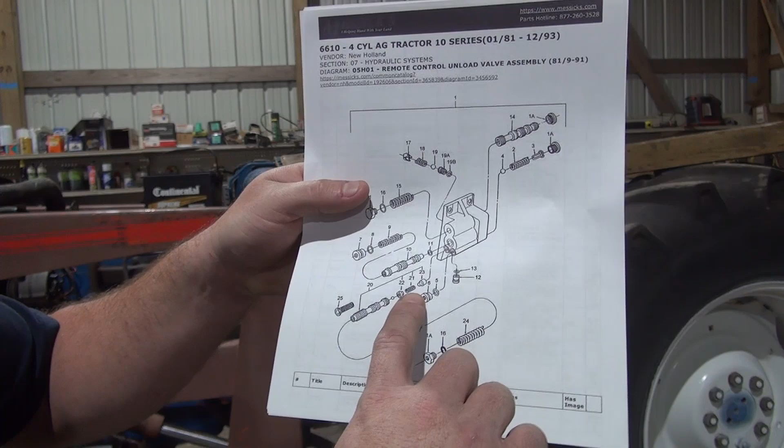There's a pressure relief right here - you take this plug out, and there's a valve right here. The camera picked this up. There's a little plug, a spring, a little valve seat, a check ball - that goes into this valve here. That is your pressure relief.

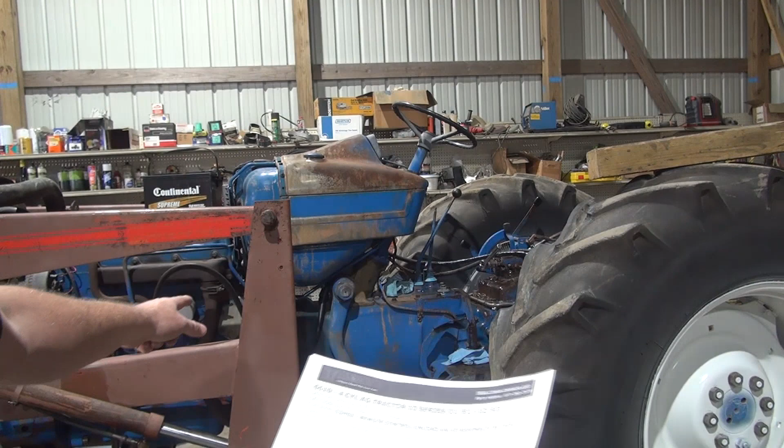I think that's for your secondary pump. Some of these tractors had a secondary pump mounted up here on the side of the engine. This one does not, so I don't know what that pressure relief really does. I mean, it does a little bit, but I don't think it's necessary, because the main pump and the transmission housing has a relief valve in it also.

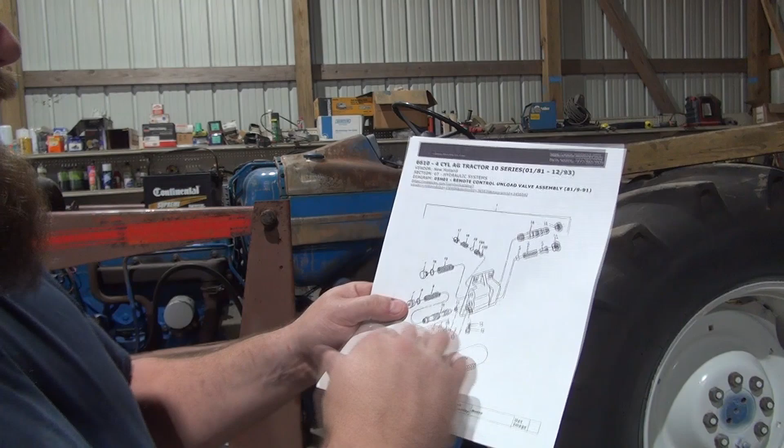Anyway, I took this out and cleaned it up. I didn't see anything wrong with it. I actually tightened it down a bit until it bottomed out, so I knew it wasn't bypassing pressure there. And I could still only get it up to about 1600 PSI. And then it would get worse - if you engaged it a couple times, a few seconds at a time, or left it on for 15 seconds or whatever, the pressure would start dropping.

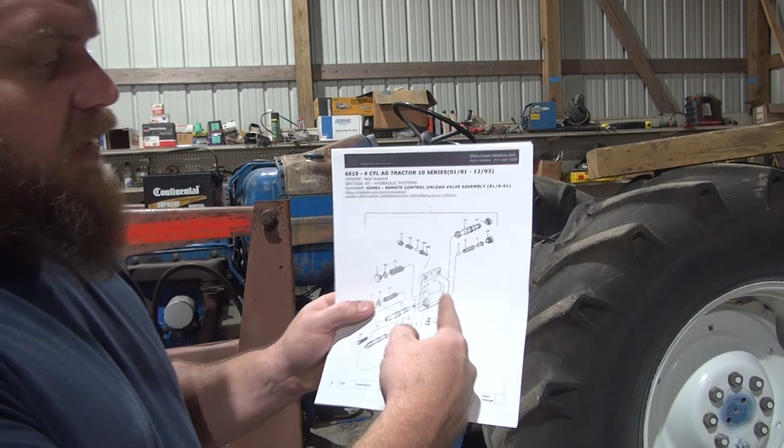It would get down to like 1100 PSI. I did that in my troubleshooting, because usually when you got a hydraulic system that's bypassing or whatnot, it'll build heat. I got the feeling of that valve there up under the seat, and I noticed it was starting to get warm across the back side of this valve, across this area right here. And I thought, there's got to be something going on with this valve.

So I took this valve all apart and went through it. I didn't have the diagram at that time, but I went through and just pulled everything out, put it back the same way that it was. I didn't see any issue with it whatsoever. So I'm still scratching my head trying to figure out what in the world I need to do here. What do I need to order? Do I need to order a hydraulic pump, or is it the valve, or is there something wrong with both of them? I'm not exactly sure at this point.

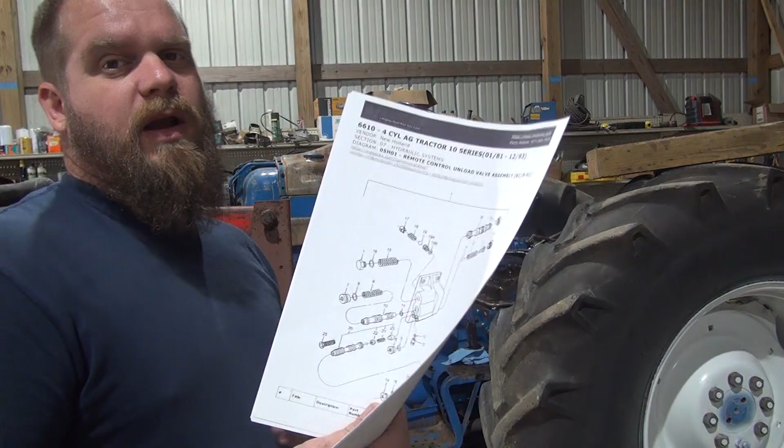So anyway, I went to Messick's and tried to research this a little bit more, and I printed out this diagram, and this is very handy. I really like this about their website, or any website that has anything like this, that you can go by and print something out. Say if you need a part for something, there's no way you're going to be able to call a dealership on the phone and say, hey, I got this valve here and I need this middle spring out from under there. They won't have any idea what you might be talking about.

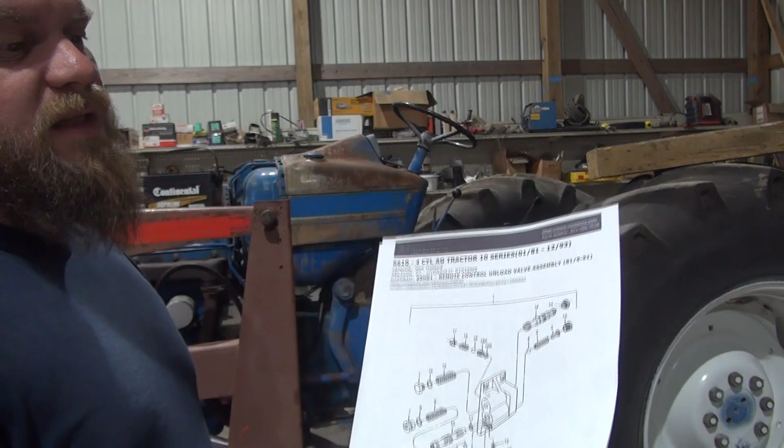But when you have a diagram like this, you can call them up and say, hey, I'm looking at this diagram right here, and I need part number so-and-so out of this diagram. And then they can look it up. It makes life a lot easier. So I really like the fact that Messick's has this on their website.

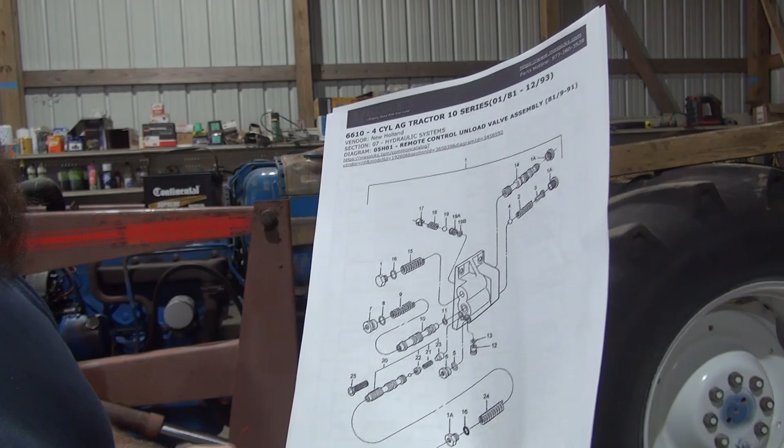So anyway, I go and I pull this diagram up, print it out and everything, and I go to looking at it. And there's two things in this valve right here that I did not see in my valve. Again, I pulled all this out. I've seen a YouTube video where a guy had a problem with this shuttle valve right here, whatever that is. It caused the same issue.

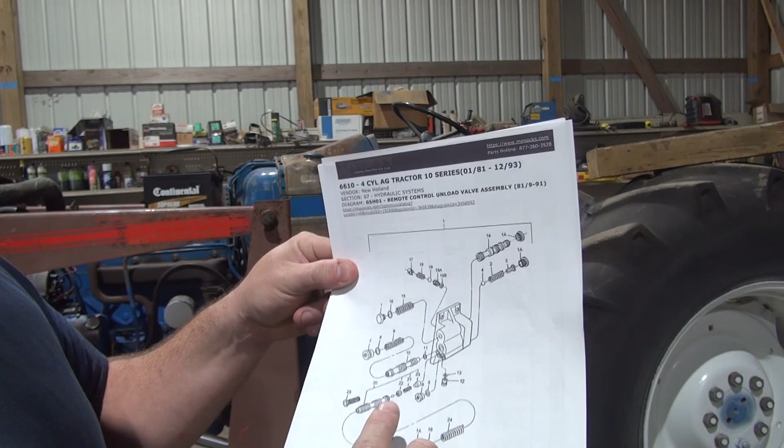And I've seen a video and some more information on the forum that they have issues with dirt getting stuck in behind this check valve and stuff right here, causing the issue, and that causes your pressure to relieve and you not get the full pressure you're supposed to get out of the remotes. So anyway, I looked at all that, I see nothing wrong with it, put it back together.

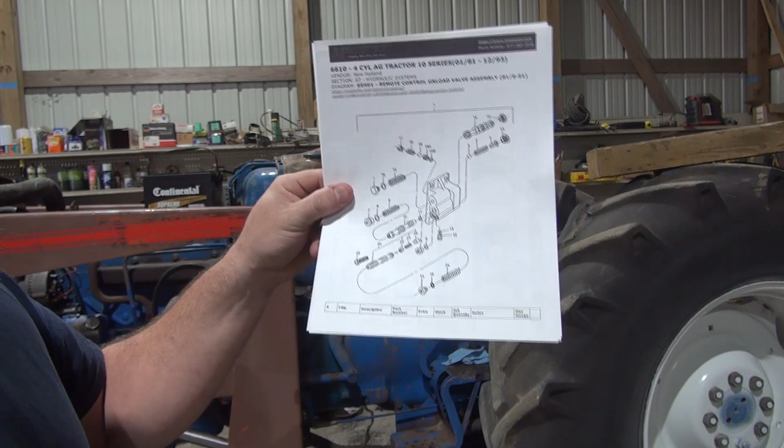So I'm still scratching my head, and I go pull up this diagram, and I go through, and I notice there's supposed to be a filter right here on this valve, which is not there on my valve. So it kind of leads me to believe that maybe somebody's been in this valve before, but that's just a filter. It shouldn't be an issue.

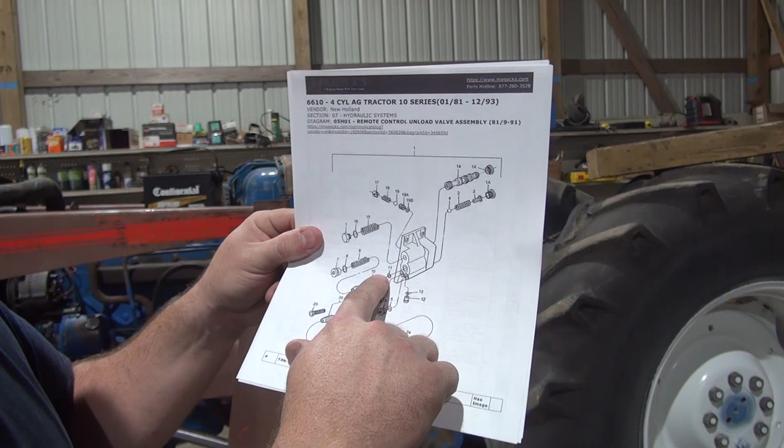The second thing I notice is on this valve right here, which is where I got the Allen wrench at over there with a ratchet sticking off in the tractor. There's an O-ring right here, that number 11 O-ring. There was no O-ring on this valve when I pulled it out. And I was like, well, I don't remember seeing that O-ring on there. So I come back out here and I pull that valve out. Sure enough, there's no O-ring in there.

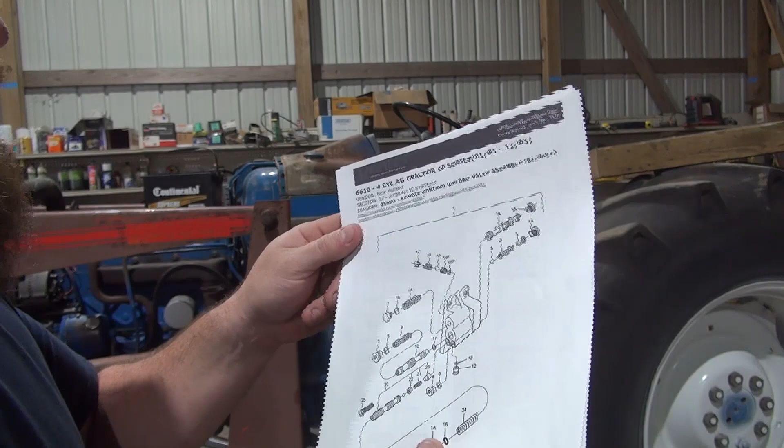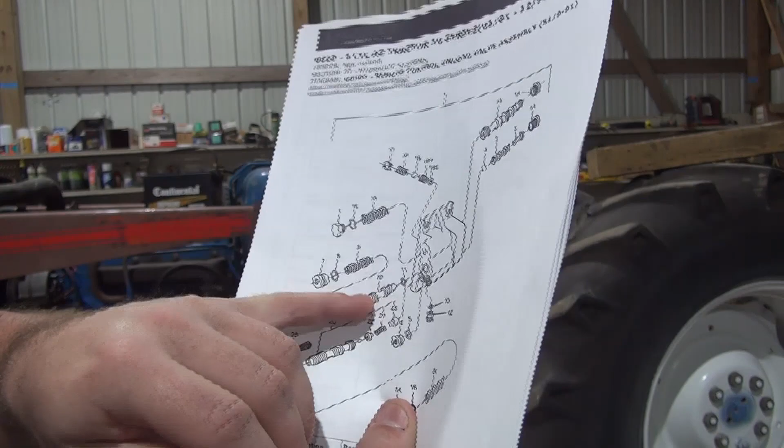I take a bore scope, look up in here with a bore scope. I don't see anything on there, any O-ring that's disintegrated or torn or anything inside there. There's no O-ring there. So I go, okay, where would this O-ring go? It's not too clear by looking at this diagram. It just shows the O-ring goes somewhere, I guess, within this valve or on this valve or to the end of this valve or something like that. So I pull the valve out and I go over there and I look and try to look up in the bore with a bore scope and try to figure out where the O-ring may go.

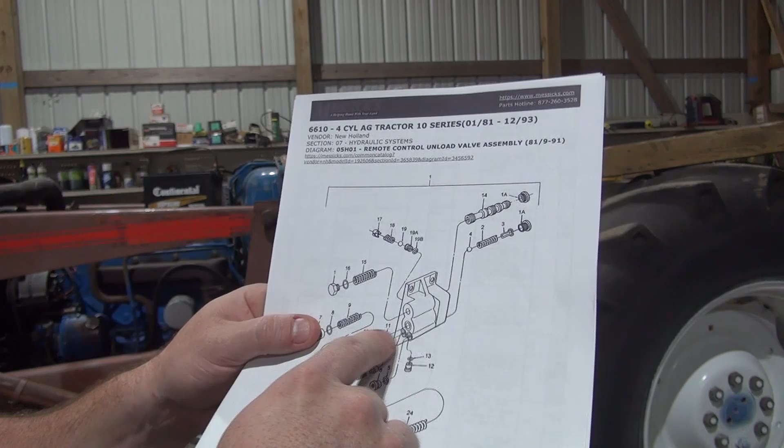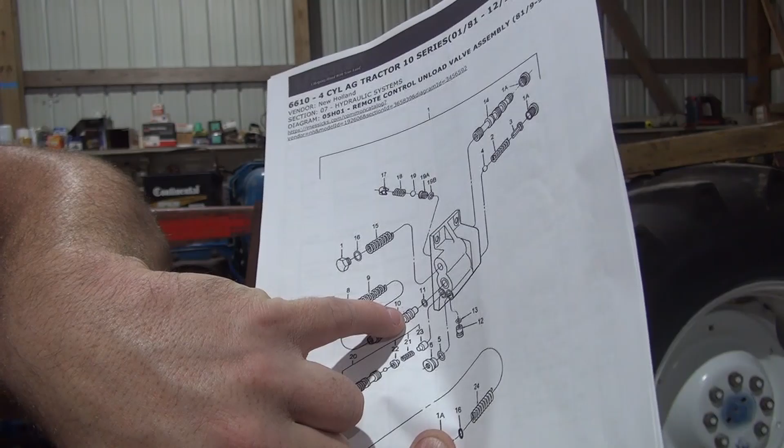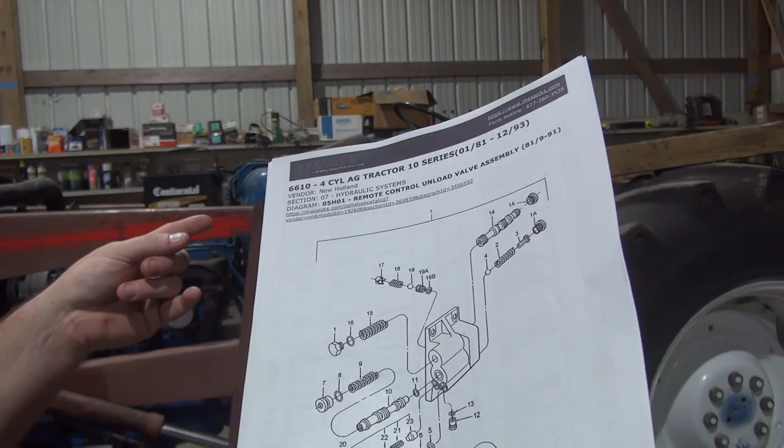What I figured out was there must supposedly be an O-ring that goes in between those two ring lands on that valve, because I put an O-ring I had out of an O-ring kit between those two ring lands, put that valve back in, and now I have 2,500 psi of pressure on my remotes like it's supposed to be. So I may demonstrate that for you guys by pulling it back apart and showing you the difference with the O-ring and without it. That way, if you run across this, it may help somebody out.

So let me pull this apart real quick. I'll crank it up and show you with the O-ring in there, then I'll pull it back out, take the O-ring out like it was, put it back in there and show you what it was doing, and you guys can see the difference that O-ring makes.

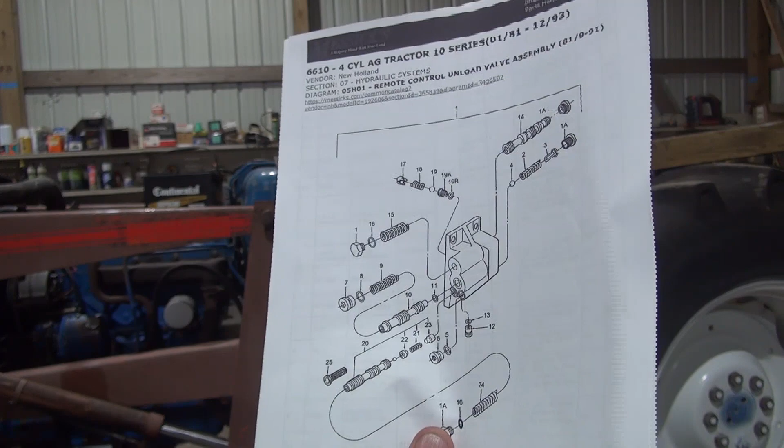I'm a little stumped on why that O-ring was not there if it's supposed to be. Surely somebody did not remove it, but at the same time, if the O-ring deteriorated, it seems like there would still be pieces of it there. So I'm not 100% sure. Let me start this thing up. I'll show you the pressure it's reading right now with the O-ring in there, and then I'm going to pull it out and show you without it in there what I've been fighting for the last 3 days.

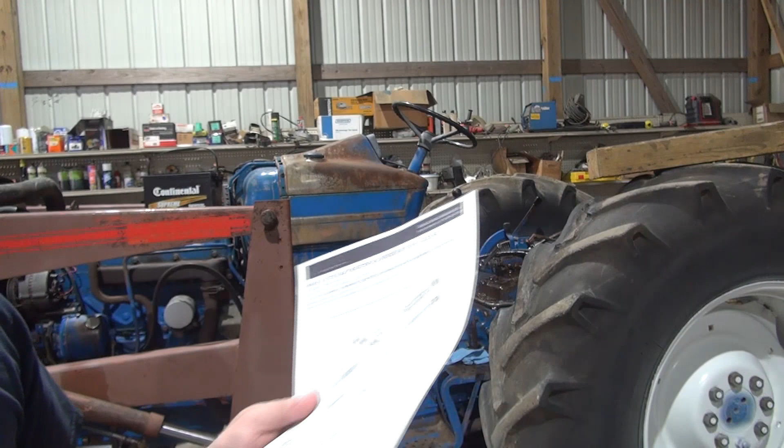All right, so this is our pressure gauge. I just got it plumbed into the remote here, and I'm fixing to engage the remote.

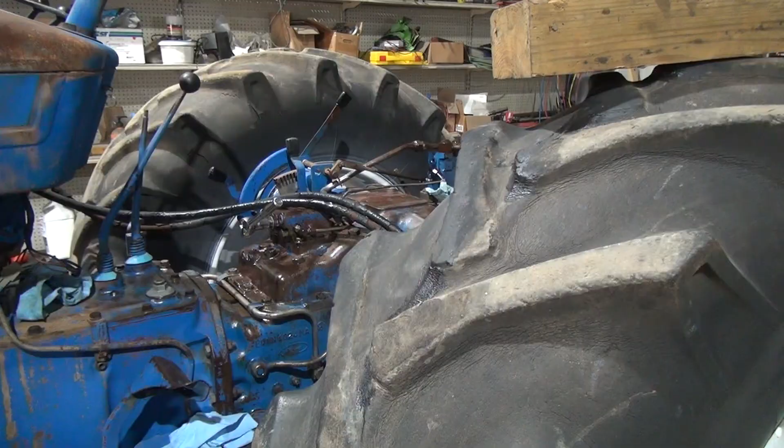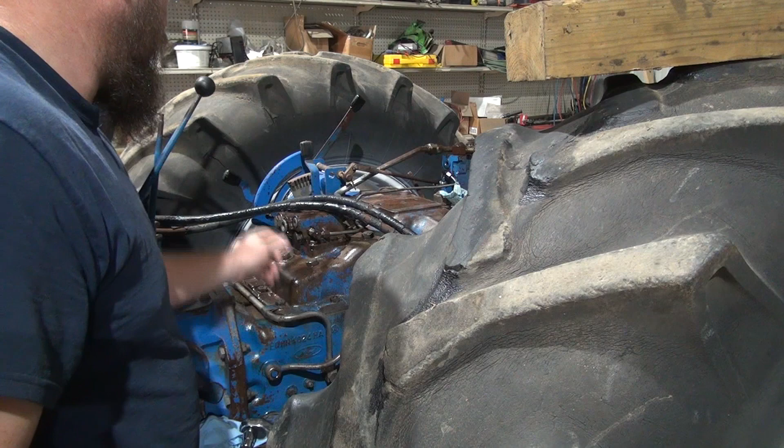Now I'm going to remove that O-ring from that valve and show you what it does. All right guys, I'm going to remove this spool valve right here and show you the O-ring that I installed on it. And the problem, in other words -- I can't talk today -- the issue is you have a spring, the plug, the spring, then there's a valve in here.

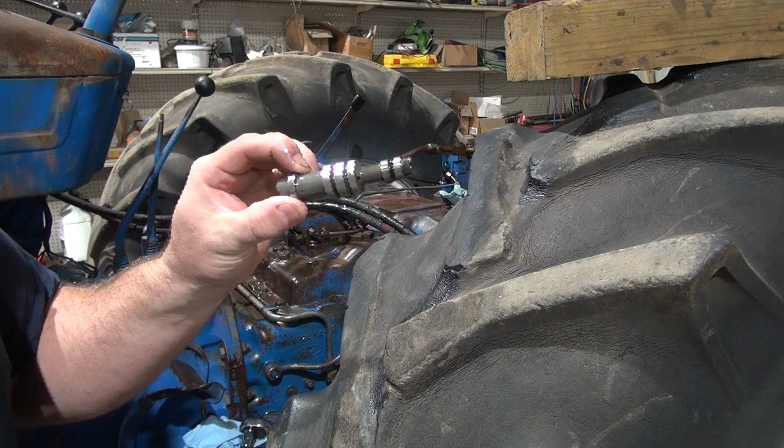See if I can get it out now that I installed an O-ring on it. Yeah. There's where I put the O-ring on that valve. As you can see right there, there was no O-ring there.

So I'm going to remove this O-ring right here and install the valve just like it was when I got the tractor, and I'll show you what the remotes were doing. I first thought this O-ring may have gone here, but it won't go all the way into the bore with it there, so I'm guessing that's not the issue. This is just an O-ring I got out of the O-ring kit.

So I hate to lay that down anywhere. Well, it's clean up there. Got it clean. We'll put this back in just like it was when I got the tractor. As I say, I could tell it seemed like something was in that valve, but just pulling it apart, you would not think there was supposed to be an O-ring right there. It looks just like a normal spool valve. You would not pick up on that without the diagram showing there's supposed to be anything there.

All right, got it back snug there. I'm going to start the thing back up and show you the pressure gauge. Let me wipe my hands off first so I don't get oil all over my camera.

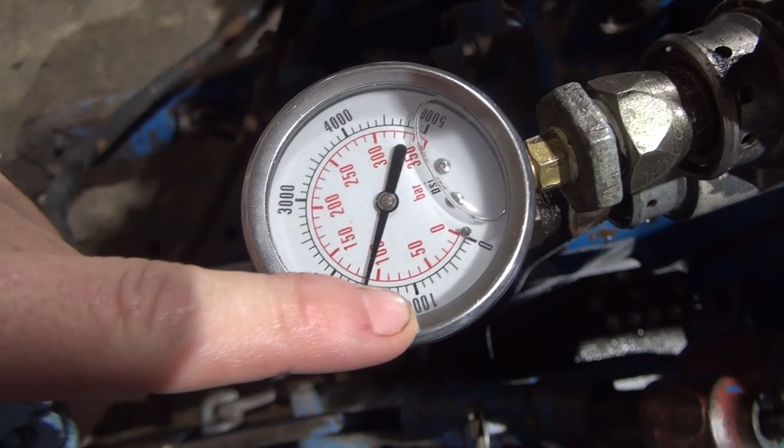This is with no O-ring. If you hold it engaged a little bit, it'll get worse. When it gets warm, it'll get down to like 11 or 1200.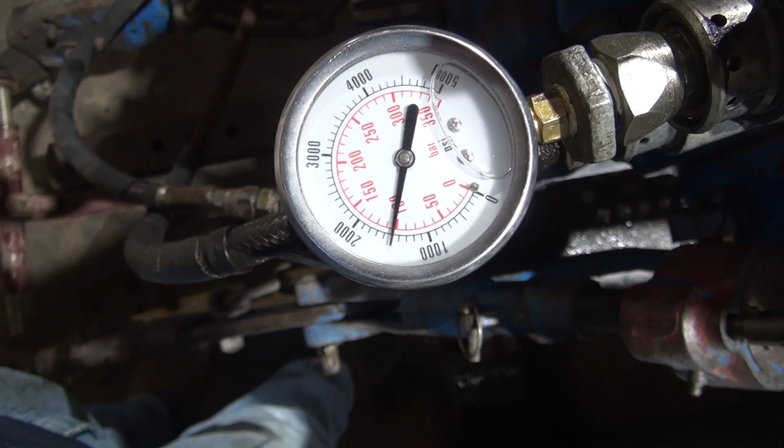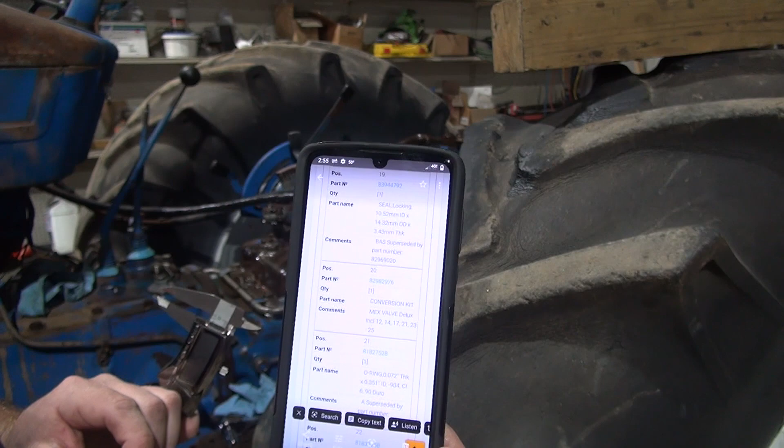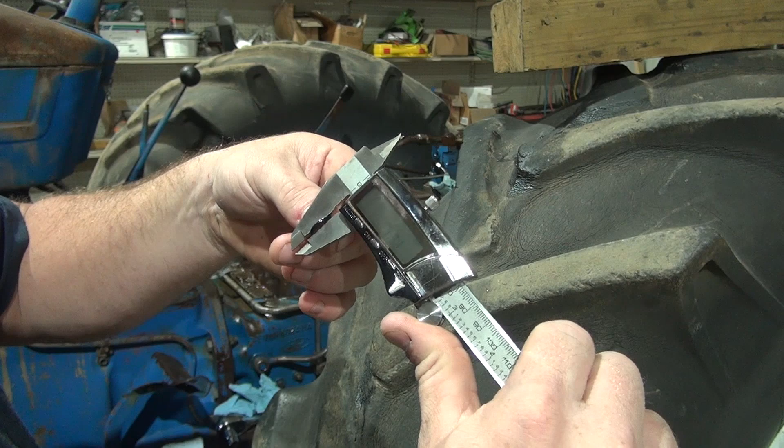Alright guys, so I actually found the dimension for this O-ring right here. Number 19, that is your dimension for this O-ring. The O-ring I'm using here is about the right ID and OD, but it is not as thick -- that one's 3.43 mm thick, and mine is showing 2.3 mm thick. But my OD is pretty close to what that's showing, and so is my ID on this. It's really close.

So this O-ring that I'm using here is not as thick as the one that's supposed to be, but it seems to be working as of right now. So that may be something I need to look into, seeing if I can order this O-ring. It did show a price on there - this O-ring was like $5 for the correct one.

As you can see, it's a little bit narrow, so having one a little bit wider would probably be a little better, but this one seems to do the trick. I may have to get my pick over there to put this on, unless I can roll it on there. Oh yeah, I got it rolled on there. See, it's just a little bit narrow.

So I think the other one is a little bit thicker. It's going to be the same size, but just a little bit thicker right there.

And when I looked up in here with the bore scope, you can see an angle on the back of this bore. It's actually got a flange - it's not just a square bore like most valves, it's a flange bore, so the O-ring will slide in. You can feel it the last little bit right there on that O-ring. Just a little bit of resistance there, and that O-ring pops in that flange.

All right, guys, so I figured I'd take a minute to show you around the other side of the tractor here, the main hydraulic pump. This is the only hydraulic pump this tractor has. Right here where your filter screws on, this is considered your main. The one that's additional on some tractors mounts on the other side, as I showed.

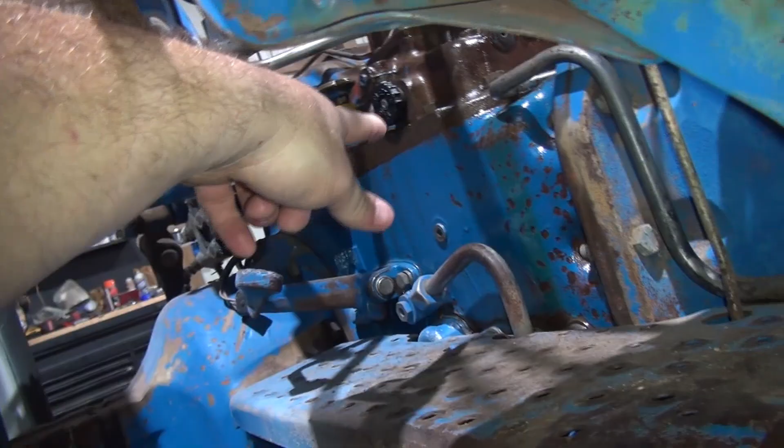This here that my finger's on is the main relief valve. That's where your main pressure line comes out right there. That is your main pressure line that goes up and comes in, goes through the pump housing. And this is a closed center load sensing valve on the hydraulic remotes back there, and that's what this here controls.

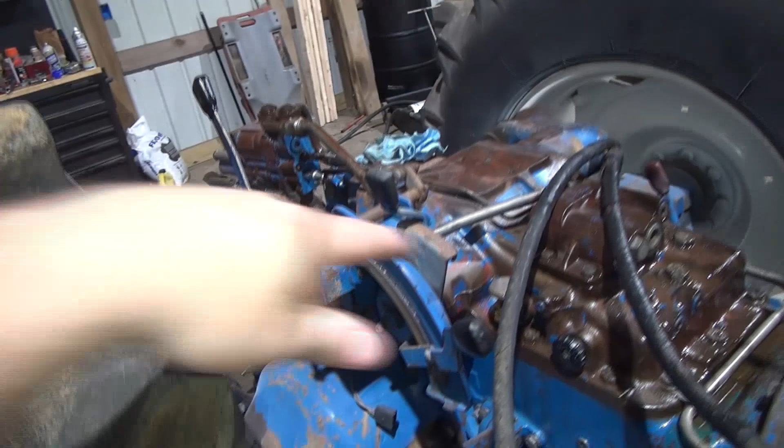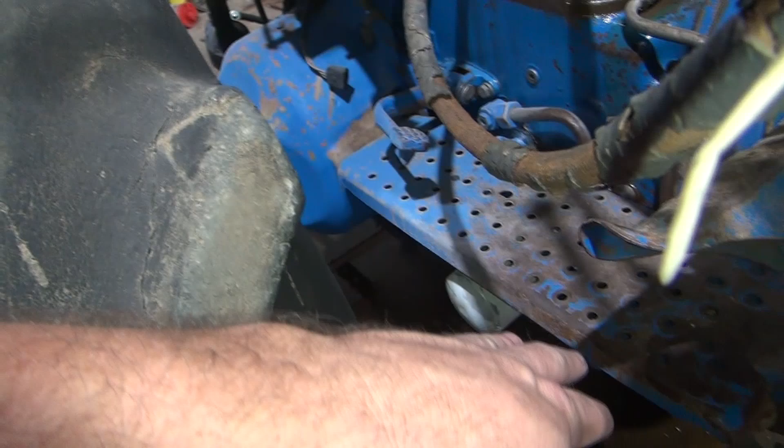Your small line comes off of your hydraulic remotes back there, your SCVs. Comes up to this, sends signal pressure to this valve to shift and allow your flow and pressure to go to that line there. But this is just a fixed displacement pump. This is not a variable displacement piston pump like is on my dozer and that sort of stuff. So this is just a fixed pump, but I think the top of this thing is open center.

And this is a closed center load sensing valve here. I don't know why they did it that way. Well, I guess they did it that way because the secondary pump, I think, is the whole reason behind the design of this particular valve and setup here. Because if it was just a single pump tractor as this is, this valve here doesn't make a whole lot of sense to me. But it is required when you have the additional pump on here, because the additional pump has

another line that comes in here, and generally on those tractors you have two sets of remotes. So this line here is a double line coming off the back, and so if you want to tie in this loader here a different way, you would have to have a load sensing closed center valve for the loader and tee into this line with the check valve on your load sense and all that stuff.

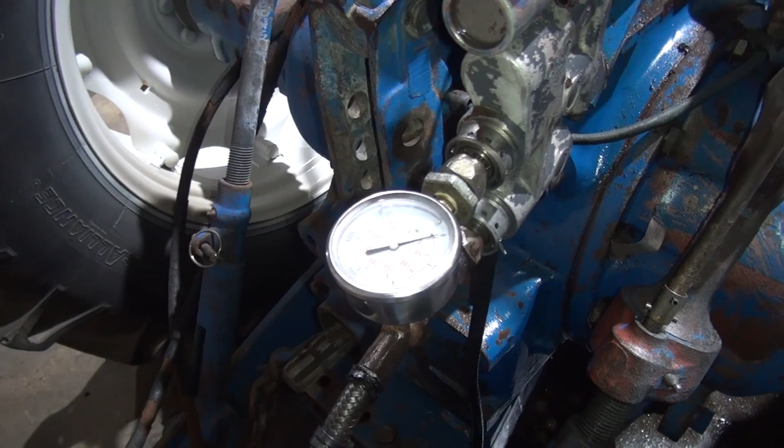But anyway, we're just using the open center valve on the loader. That's the way it was done, and coming off the remote. That is the simplest way to do it. Not the best, but the simplest. And so that's the way we're going to run it. I'm going to fire this thing up. We're going to check this pressure one more time, and I think we're going to be good to go on this project.

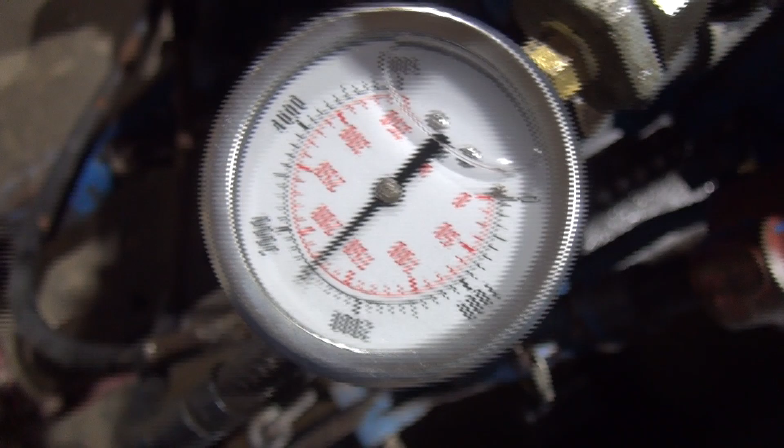All right, guys, so everything seems to work. I took it out there and picked up some stuff with it. Everything as far as seems to work on the loader and everything. Like I said, we got a lot of work to do to this tractor.